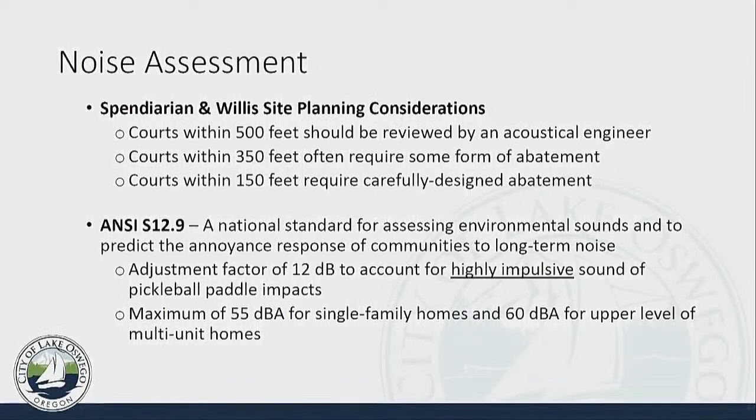One thing I've learned about sound over the last few months is that it's really challenging to demonstrate to people what 55 decibels sounds like, especially when you factor in frequency, pitch, distance, background noise, and impulsiveness, all of which affect how we perceive noise.

Moderate rainfall, we all know that sound, that's around 50. 55 is the threshold they're using here for pickleball noise in a residential area, about as loud as a household refrigerator. It's a different type of sound, but this is the adjusted decibel level.

And of course, it goes all the way up to something like an ambulance siren, which is about 130 decibels. That's on the very loud end.

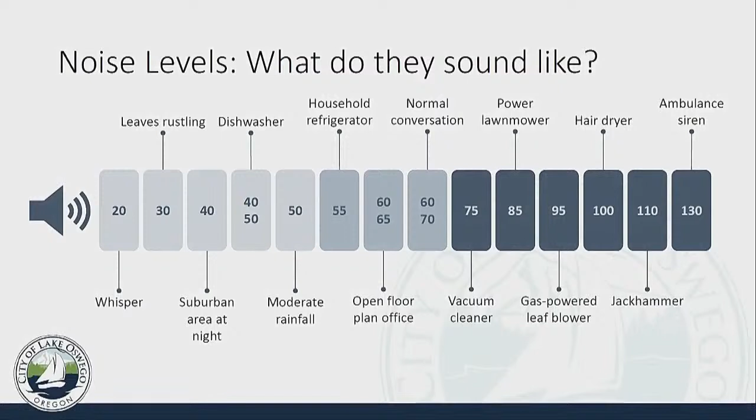To establish a basis for the sound levels generated by 6 pickleball courts in this particular location, Spendiarian and Willis first modeled the sound levels without any noise mitigation.

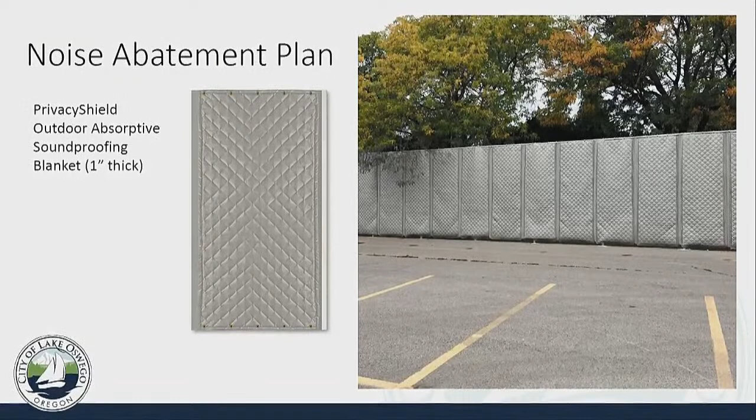So what are the implications of this study on the anticipated project budget? Well, the original cost was estimated at $60,000, and that included restriping, resurfacing, new nets, and filling in that fence gap.

But it did assume that we would be able to reuse the Acoustifence material currently installed at George Rogers. And while we would be able to reuse some of it for the east wall, we now know that we would also be required to purchase some sound absorptive material for this plan.

The cost for those sound absorbing blankets is $22,415 to cover both the north and south fences. An additional cost to replace the south fence, currently 10 feet high, with a 12-foot high fence is estimated at around $21,600. The noise study also recommends that all fence panels be evaluated to ensure they can withstand the additional wind load from having covers on all of them.

Conducting an architectural study of the fire station to determine if it could be retrofitted to mitigate the sound would also represent an additional cost that's not listed here.

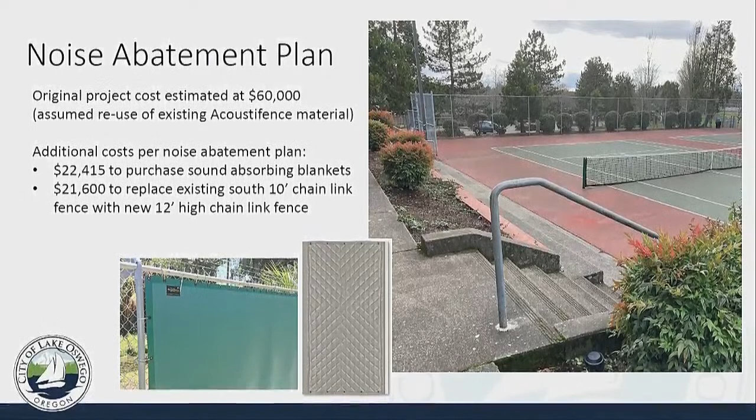We're going to move on to the parking study now. Westlake Park currently has 151 parking spaces in total. There are 90 spaces in the west lot with access off of Melrose, and 61 spaces in the east lot with access off of Bunick. That does not include the spaces designated for the fire station.

Anecdotally, the park's neighbors have told us that the east lot is often significantly busier than the west lot. This does make sense when you consider that the east lot has easier access to 2 out of the 3 ball field dugouts, as well as the basketball court, tennis court, play area, and picnic shelter.

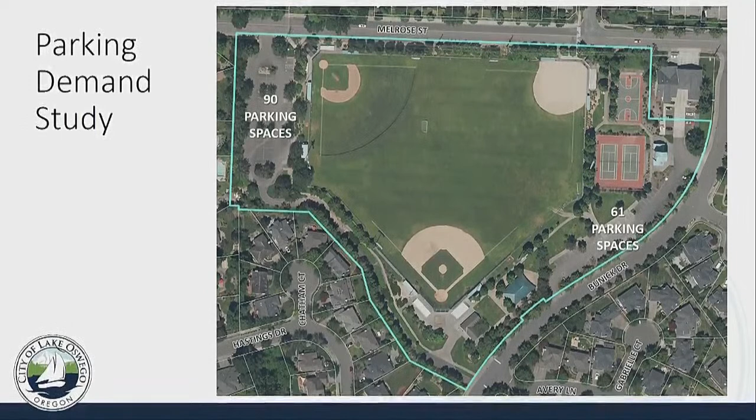For assessing the demand generated by pickleball as a standalone use, there is currently no data published in the ITE manual for pickleball courts specifically. Rather than rely on parking demand rates for tennis, which are published but not really an apples-to-apples comparison due to some of the characteristics we know of those 2 games.

So instead, they conducted research on what other cities have done to address this. Unfortunately, parking data for pickleball is extremely limited. They did find a recent study from Vancouver, BC, which found that the more popular of that city's pickleball sites generated a peak demand of 5 vehicles per court. This is higher than the peak parking demand rate listed in the ITE manual for tennis, which is 2.97 vehicles per court. So the study used that more conservative rate of 5 vehicles per court for this analysis, giving us a peak demand of 30 vehicles total for all 6 courts.

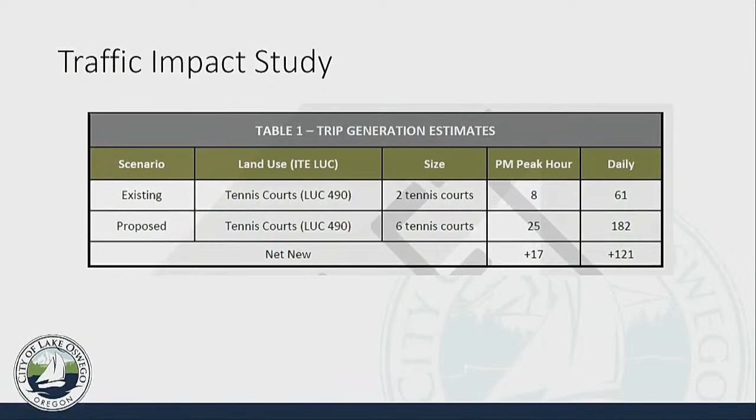They also reviewed crash rates at the intersections of Kruse with Westlake and Carman Drive, which becomes Fosberg as it goes north, and found there were no existing safety issues identified at either intersection, and that both intersections met the city's mobility and operational standards and would continue to do so even with the addition of these new daily trips generated by pickleball.

Ultimately, the study concluded that converting 2 tennis courts to 6 pickleball courts would not degrade the operations or safety of any major collector roadways nearby, would not change traffic patterns on local streets within half a mile of the site, and would not result in needing to change the functional classification of any of the nearby roadways.

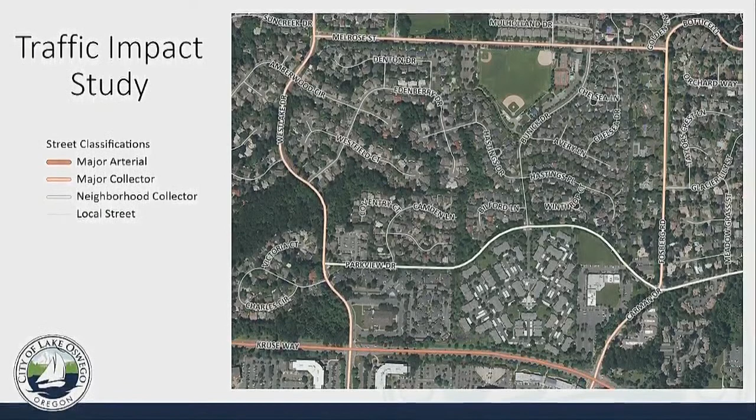The last thing I want to touch on is community engagement. Since we received direction to explore this option for Westlake Park in January, we've met with numerous community members to gather their input on the proposal. I won't speak for them since many are here tonight and will speak on their own, but I'll share a brief overview of where we've been and what we've heard. We attended meetings hosted by the Westlake Neighborhood Association and the Oak Creek Neighborhood Association, during which residents expressed concerns about the impacts of this project on neighborhood noise, parking, traffic, home values, their ability to work from home, and public safety, among other things. Those are just the most common concerns we heard.

We also hosted a neighborhood meeting on April 17th. For that meeting, we mailed a letter of invitation to all property owners within 300 feet of the park, as well as to the Westlake Neighborhood Association board members and all of the neighborhood association chairs of the abutting neighborhoods, which include Oak Creek, Waluga, Mountain Park, Holly Orchard, and Lake Forest.

Signs with a meeting date, time, location and a QR code linking to the website were posted at four different locations on the property in both English and Mandarin, and the meeting information was posted to the project website. 101 community members attended that meeting, mostly from Westlake, Oak Creek, and other nearby neighborhood associations.

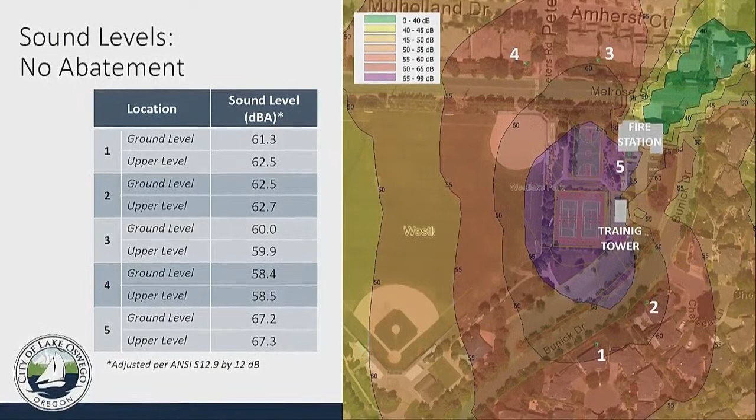Yep, okay. So essentially then, we don't have to have live players playing. They have the simulations that you feel confident is good information. I feel very confident in their experience. They've done something like 50 of these.

They're regularly witnesses in court cases. They stand by their work, and other people stand by their work. I find that their experience is really unbiased in that they've worked for pickleball clubs just as many times as they've worked for homeowners associations, and they've done the same type of process.

Okay, and then there's kind of what I would call ambient noise level consideration. Sometimes when you're at Westlake Park, you can hear I-5, and sometimes you can't. Depending upon where you live in town, you can hear the Lake Ridge band during halftime of a football game, or the Lake Oswego High School game on a particular night when there's, I don't know, perfect wind conditions or whatever. I would assume that there's some background noise level. Did they talk about that would affect people at higher elevations going up the Mountain Park area?

Yeah, they do take into account sort of a general background noise level for this sort of neighborhood. They'll look at the neighborhood characteristics and say, okay, a typical neighborhood might be this loud as background noise, and that does factor in. But what they're really focusing on is that adjusted decibel level for pickleball noise. I think the most important thing they consider is that impulsive nature of the sound and the way that they adjust for that.

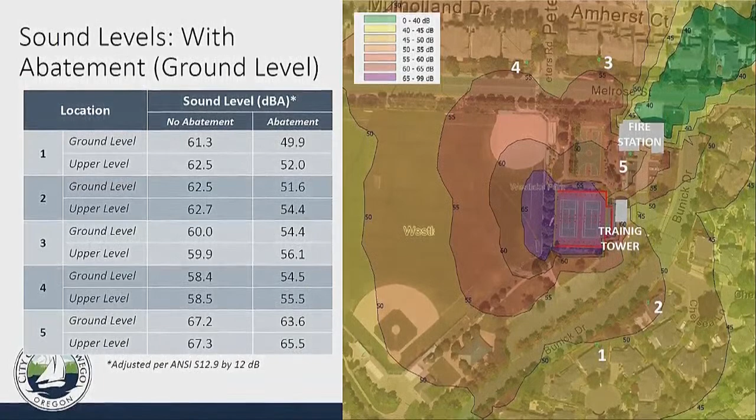And remember, what was the sound level, even with mitigation, at George Rogers? I would have to go back to the study. The decibel, yeah. One moment. So they measured between 47 and 60, depending on the location. You have to flip back and forth a little bit. I think the closest measurements were 58, 59, 60 decibels. That's unadjusted.

So that's the other point of clarification I'll make, these are levels adjusted by 12 decibels to account for the impulsive nature of the sound. This is what Spendiarian and Willis does with their studies - they account for that impulsive pop, pop, pop everyone talks about by essentially increasing the reading to account for that sound. And I do not believe that was done for the study at George Rogers. So 60 in the previous study would be 72 in this study, and 60 in this study is actually 48 actual sound, but adjusted up 12.

And was the same mitigation used there as this one? No, the George Rogers Park courts only had the MLV vinyl fencing cover, which reflects sound. For this project, they are recommending reflective panels only on one side, because when sound comes this way and bounces off the green cover, it goes back to the west, where there are no homes within 800 feet. For the north and south sides, they're recommending a new material we haven't used before called the sound absorptive blanket, which actually absorbs sound rather than bouncing it off.

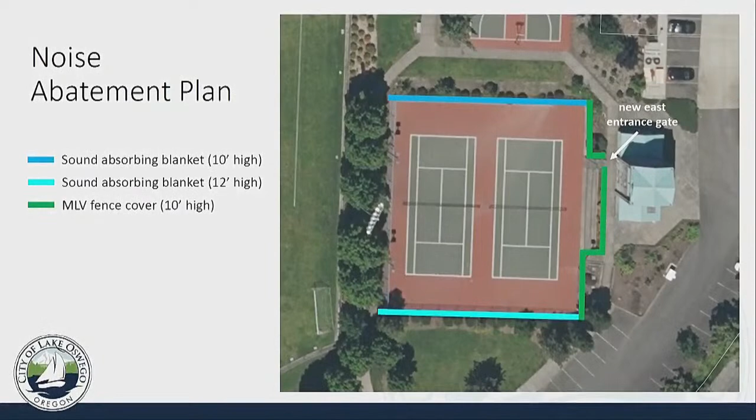And do you think if we used it at George Rogers, it would be the same level as here? Our acoustical engineer believes that if we design and install the mitigation exactly as designed, then these are the adjusted noise levels you will get at these particular locations. Okay, thank you. But to answer your question, we have not had this level of study, or this type of study, at George Rogers. Yeah, that's what I wanted. Thank you.